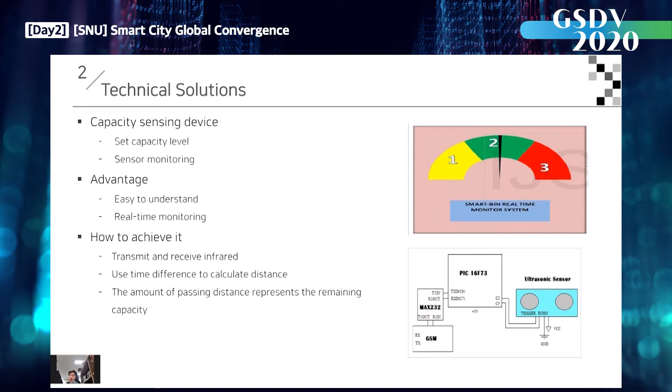The second solution is about how to solve this problem with technology. An ultrasonic sensor can measure the amount of waste and send this data to the center, and the information on waste amount can be visualized on a map.

Chapter 4 is Management Solutions. We believe SNU students will solve the waste problem on our campus. We have prepared a mobile Living Lab platform for students to participate in this campaign.

A Living Lab is an intersection of scientific innovations. It is a user-centered, open innovation system, often operating in a way that integrates current research and innovation processes within a public-private-people partnership. Living Labs are natural sites of convergence, bringing together different approaches to solve real campus problems.

The mobile app Keda is a student-made Living Lab platform on our campus. Keda integrates a real-time monitoring system, and data is collected from students and their mobile devices, then processed and analyzed to allow campus officials to interact directly with the community in order to enable better waste management on campus.

The addition of citizen science as a byproduct—smart citizens, in this case smart students—could strengthen the relationship between citizen science, smart campus, and living labs. Smart citizens make it possible for living labs to flourish through their scientific and cultural literacy.

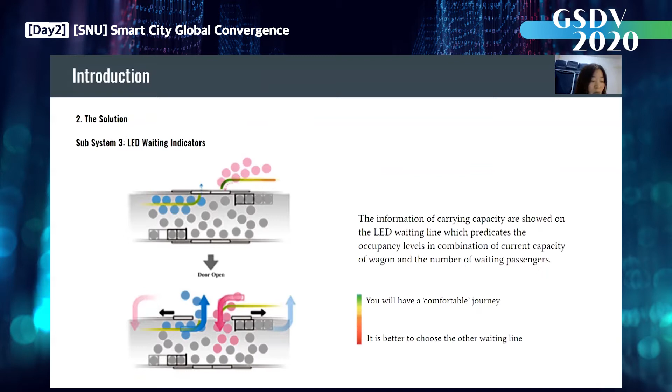The last sub-solution is the LED waiting indicator. The predictive information of carrying capacity will be shown on the LED waiting line. It predicts the occupancy level by combining the current capacity of the wagon and the number of waiting passengers, providing reference information for passengers to choose the better waiting line. In addition, passengers can follow the LED guideline for better and faster entry and exit from the subway efficiently without blocking traffic.

This part is theoretical background. The goal of the project is to provide a more efficient and comfortable transportation system for subway passengers.

To achieve this, we need to identify three major components of a smart city. First is the technology component. We use ICT and big data to secure data applied to our project. In order to secure this, sensors that collect data and technology that process data in real time are required.

Second is the human component. In order for our project to work properly, we need to identify the problems people are feeling, and we need to make sure that people are aware of the usefulness of the project we plan to use.

Third is the government component. The government provides necessary data for this project and participates through investment infrastructure.

The most needed resource for this project are data and sensors that can collect data. It also needs an algorithm that can process real-time data collected through sensors.

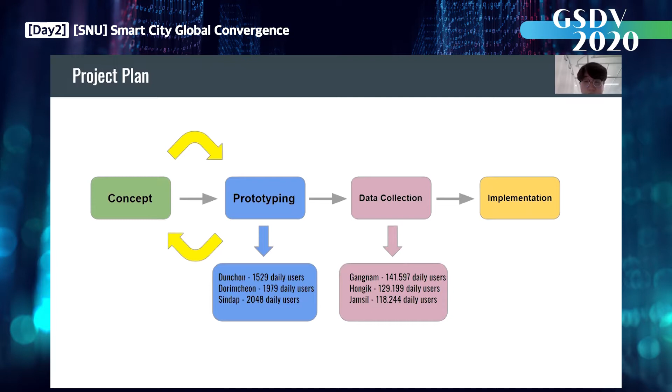So our milestones are as follows. First is empirical on-site research. We should observe passengers' behavior and gather empirical data of how passengers move in the station. Second, we can conduct demand research.

Third, we will operate test workshops to see whether the value of smart passenger allocation systems are successfully delivered. And the last milestone is data access and data collection. In this stage, we should care about the privacy issue.

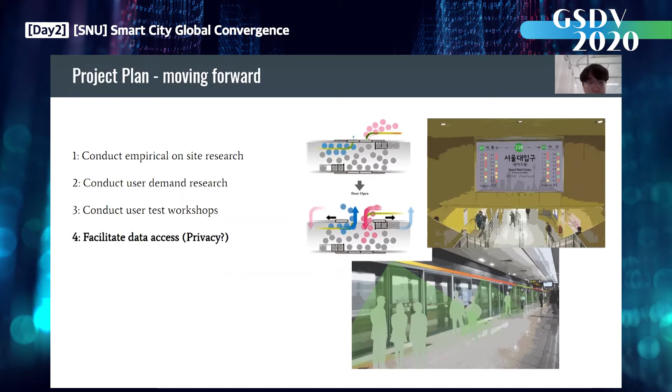This is our reference, and this is the end of our presentation about smart passenger allocation system. Thank you for your listening.

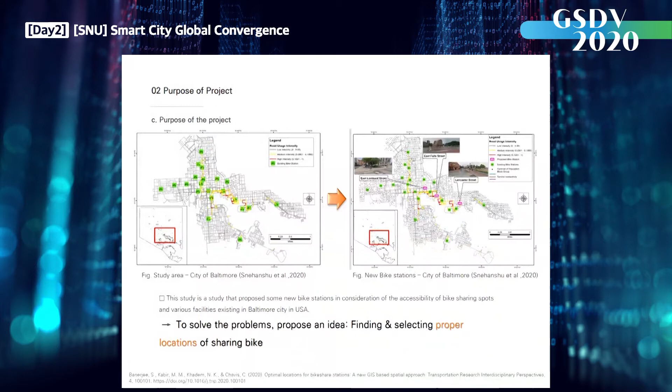This chapter will introduce the contents and methods of the project. First of all, this project consists of 4 main frameworks. First, we plan to collect prior research and issues on the project topic. A literature study will confirm the role and importance of shared mobility, especially shared bicycles. At the same time, we will set a direction and purpose of the specific project. The following pictures are excerpts of some of the papers and articles we collected during the pilot studies.

The third step is to derive the location characteristics of the rental facilities through various data. In this course, we will select location characteristics in three main ways. First, we will derive the universal location characteristics of the rental facilities by utilizing papers and literature related to the location of shared mobility rental facilities. At the same time, our group will conduct a density analysis of public bicycle rental facilities operated by Seoul and other cities to derive location characteristics from the overall area.

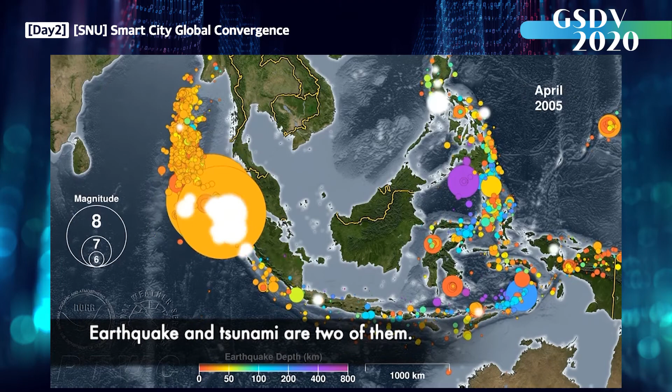Despite being blessed, Indonesia is so prone to natural disasters. Earthquake and tsunami are two of them, leaving people on the coastline in danger. Tsunami causes loss of homes, jobs, and even lives. Aerial survey with drone can map coastal terrains with 3D images. This spatial data can be useful for decision making.

When the disaster doesn't occur, with a good business model, drone can be a source of living. Drone can give a bird's-eye view of coastal panorama as a new tourism attraction, for resilience and sustainable development of Indonesia.

The second case is a solution for Rwanda, wildlife safari. In the past, the only way animals would benefit people was through hunting, which is a one-way relationship. Today, because of ecotourism, both people and animals are taking benefits.

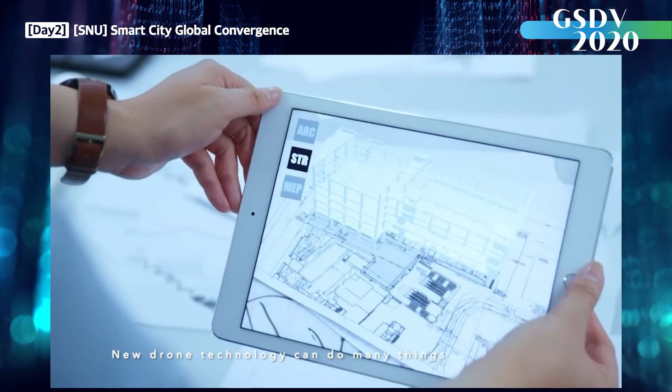Sensor-equipped drones are used to gather data of airflow between buildings for vegetation placement, even directing the way of pedestrians. Traditional building inspections can be expensive and time-consuming. New drone technology can do many things in a safe and inexpensive way for better city planning.

Another global case is in Rwanda. Kigali, the capital city of Rwanda, is a modern and clean city, but outside of it, the infrastructure deteriorates fast.

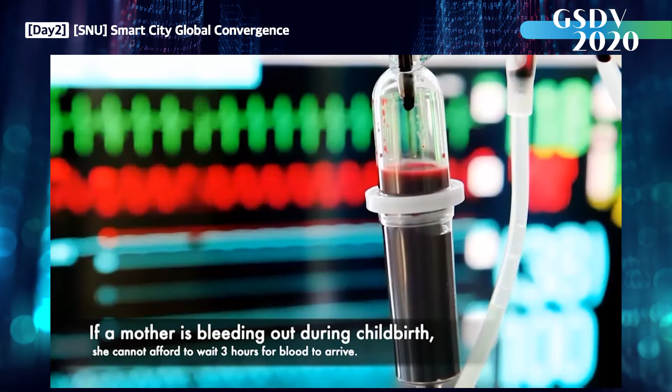Medical supplies by nature need to be on hand quickly. If a mother is bleeding out during childbirth, she cannot afford to wait 3 hours for blood to arrive. A company called Zipline is working to solve this problem with its fleet of autonomous drones.

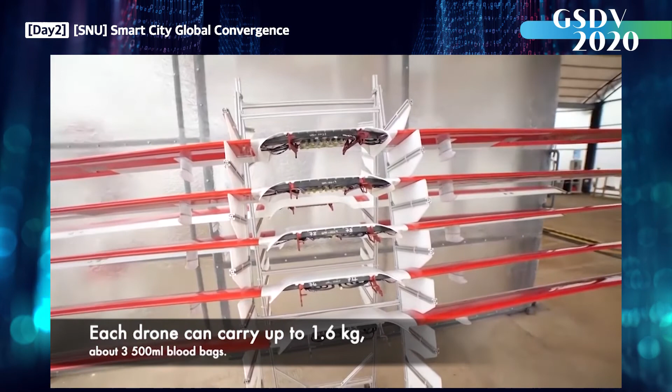Each drone can carry up to 1.6 kilograms, which is about three 500 milliliter blood bags, with fast deploy and can fly autonomously at a speed of 100 kilometers per hour. These drones are so important to Rwanda's healthcare sector, saving lives at the perfect time.

Now we are making proposals for Siheung Smart City. The main proposer is Siheung Global Drone Innovation Center. Not only for the National Innovation System, Siheung Global Drone Platform should be able to provide services for other countries.

Global Siheung Drone Platform offers services such as 3D map generator from drone survey, 2D image analysis system for on-demand case or specific system, real-time image analyzer for special real-time cases, global ground station operation, LiDAR, smart radar development and other drone equipment, and business model incubation for drone utilization.

The Innovation Center will function in many ways. As a global drone education institution, it will provide drone flight training and issuance of qualifications. It will be a center of global drone technology development with drone automatic charging stations. It will also provide global real-time drone services.

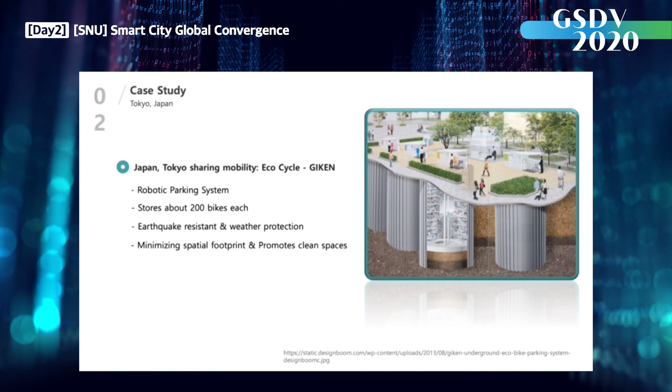The space measures about 8 by 11 meters below the street and is earthquake resistant. Being underground, it also keeps the bike safe from harsh weather and theft. With this high volume and density, it minimizes spatial footprints, promotes cleaner spaces, and more opportunities for green spaces.

So with the increasing popularity of eco-friendly mobility, for future innovations, Japan should first recognize bicycle sharing as a public asset instead of a social experiment.

Secondly, electric scooters are recently grabbing attention and are planned to be released as a next-generation transportation method in Japan by this year. The goal is to provide a safe vehicle for all ages by being lightweight and easily adjusted when it comes to speed.

However, the challenge within this is that electric scooters are considered a motorbike in Japan, thus one needs a license to ride one, which limits its scale of users and accessibility.

Nonetheless, the case of sharing mobility in Japan can teach us a lot about what to consider, how to further and better implement it into our campus today. Let's take a look at site analysis.

In Seoul National University campus, students can take city buses and shuttle buses. However, many students have to walk most areas of campus since there is no transportation going through the campus. Especially, Gwanak campus is located on the mountain, so the slope of the road is very steep and the distance between buildings is quite long. These factors make it more difficult for students to move around campus.

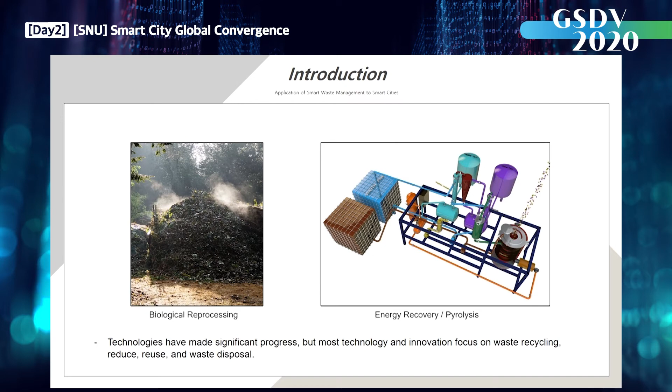Technologies have made significant progress, but most technology and innovation focus on waste recycling, reduce, reuse, and waste disposal steps, such as biological reprocessing, energy recovery, and pyrolysis process. But for the waste collection, transport, and waste segregation steps, they still function as they did 30 years ago. It's not really smart enough for cities now.

For our project, we will focus on combining waste management problems with smart technology and innovation, such as IoT, big data analysis, AI, robotics, and so on, and try to find out a new smart waste management system. Waste management is an unavoidable challenge in today's smart city, and it's also a problem that people in the city can experience in their daily life.

As we know, the biggest problem in waste management is separating waste. In this case, technology plays an important role. We promote cases with separating and technology as keywords.

The first case we promote is a smart bin. Why smart bin? The problem in separating waste is a big issue. Currently, technology cannot properly separate all types of waste yet. That's why separation of waste is still an important thing to do to speed up waste processing. Not everyone is familiar with separating garbage, especially foreigners.

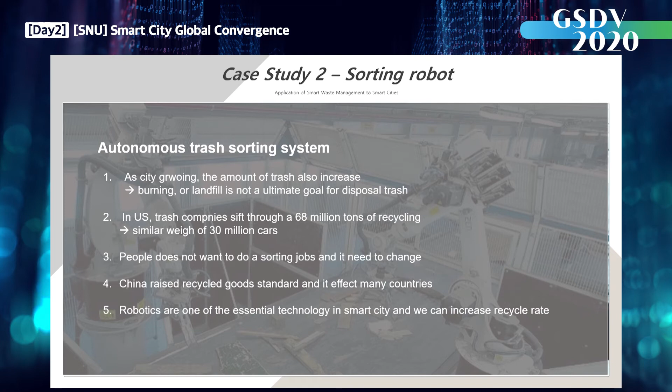When using this robot, we do not need human resources for this job. Second, as many people are concerned about the sorting rate, with AI or deep learning we can increase the sorting rate. In Google's case, using this robot, they reduced the waste rate in their office from 20% to 5%. Furthermore, we can expand this mechanism to other places.

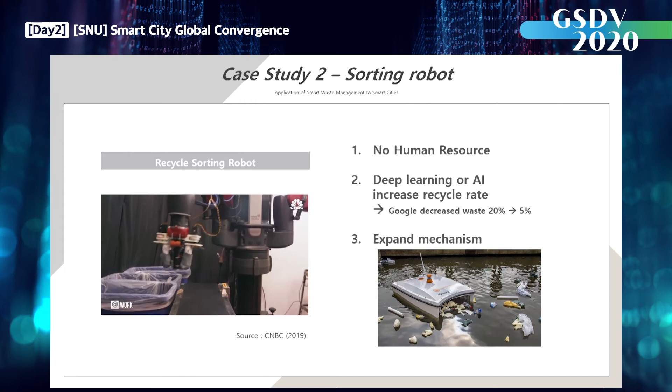As shown in the bottom right picture, we can use this mechanism for sea or river cleaning, or stadium or concert cleaning. How do we apply this technology at Siheung campus? We can expect two cases.

First, we hope that Siheung campus becomes crowded with many companies, such as startups or ventures, like Google, where robots move around the office and sort recycling garbage. It sounds complicated, but it's easy to understand if you think of a robot vacuum cleaner that also has a recycling classification function.

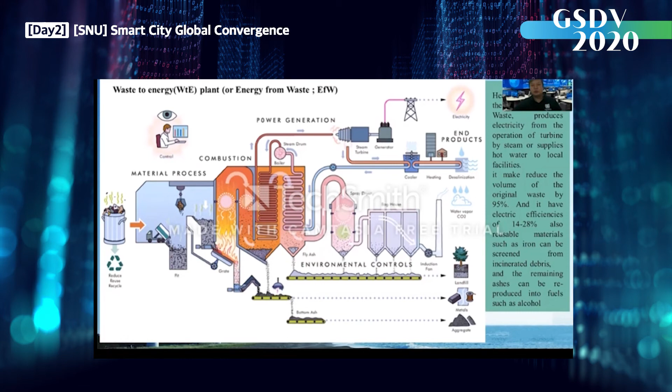The other 50% comes from selling the energy, electricity, and heat. The general process to generate electricity in waste-to-energy power plants is similar to other power plants. The only main difference is they use waste materials. This waste material will be transported to the combustion chamber, and high-pressurized steam will be generated. This high-pressurized steam will rotate the turbine, and the turbine will rotate the generator where the electricity is generated. This high-pressurized steam is also the main resource for the heat.

First, rubbish or waste will be unloaded from trucks, and they use loading claws which transfer the rubbish to a conveyor. All the waste will be sorted out using an optical sorting system with cameras, and AI technology will be used. The main reason is it removes harmful waste, and the sorted waste will be transferred to the combustion chamber, with the whole process monitored from the control room.

In the combustion chamber, the temperature reaches 850 Celsius, the same as volcano lava. After burning the waste, about 20% of the waste remains, called bottom ash. From the bottom ash, metals are removed by powerful electromagnets, and 50 tons of metals are collected every week, which are sold to the recycling center.

And these debris will be used to make construction blocks and also for roads. And all this process will be monitored 24 hours, 7 days a week from the control tower.

Oslo City has a plan to increase their capacity. They want to add capacity which will use another 160,000 tons every year, producing 55.4 megawatts of heat, supplying an additional 40,000 households, and additional 10.5 megawatts of electricity, supplying another 20,000 households.

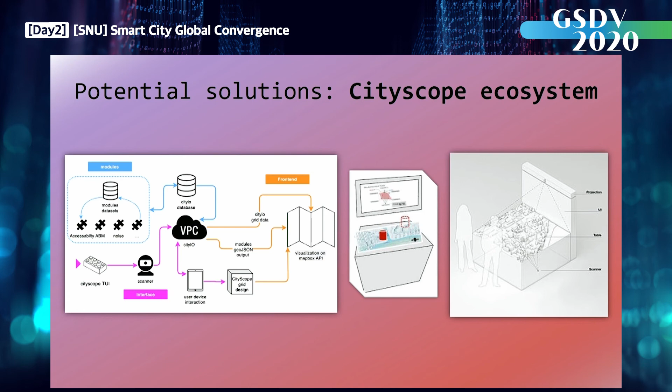Cityscope is an undertaking led at the MIT Media Lab City Science group. It combines a tangible, interactive table and digital platform to solve urban planning and design problems. They develop and deploy these tools around the world and maintain a free and open source community for the majority of their work. Urban performance indicators include three core modules: a physical 3D model, a tangible interactive interface for interventions, and a feedback system that computes and analyzes units.

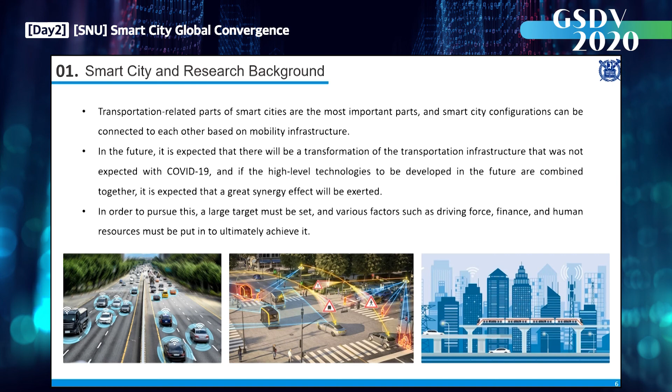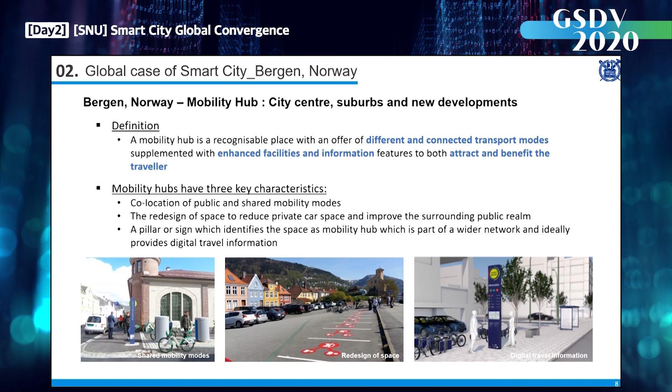The second topic is about global cases of smart city. This definition has been created building upon European best practice. A mobility hub is designed and specially organized in an optimal way to facilitate access to transport between modes, as well as provide extra transport-related and digital services. Mobility hubs will generally, but not necessarily, be situated at significant points on major public transport corridors, as they form a critical element in supporting high-frequency public transport within cities and large towns. Mobility hubs can be seen as an interface between the transport network and the spatial structure of an area.

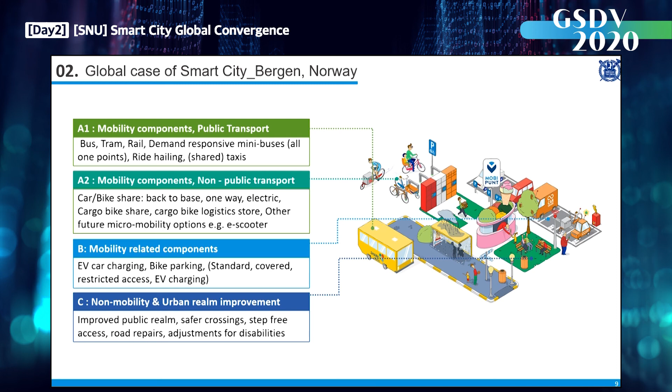Mobility hubs include a range of different components. This diagram illustrates some of the most commonly used components. Mobility hubs can be developed in a range of contexts, from city centers to rural areas. There is no one-size-fits-all design for the mobility hub. Tailor-made solutions need to be created for each location using experience from other countries. Mobility hubs need to be adapted to the setting, both in terms of the type of component and their scale. By overlaying the type of place, such as workplace, each area will be able to create a set of combinations which can be replicated across their area.

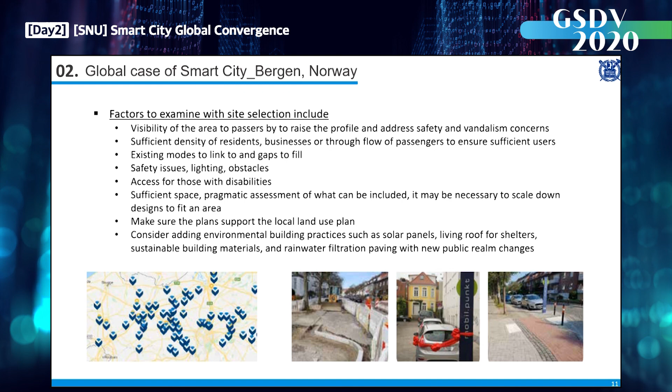Next is about Japan's smart city case. Japan planned the smart city in 2016. Japan's smart city aim is to create new value by realizing a new society through new industries such as IoT, big data, robot technology, and AI, and by building a system that highly fuses virtual and real spaces in cities. They have 5 strategies to implement the smart city.

Among these, we will talk about mobility. When planning transportation as a background, it was planned to make it easier for all citizens to move from the outskirts of the city to the urban centers. Therefore, they established a system that enables autonomous driving.

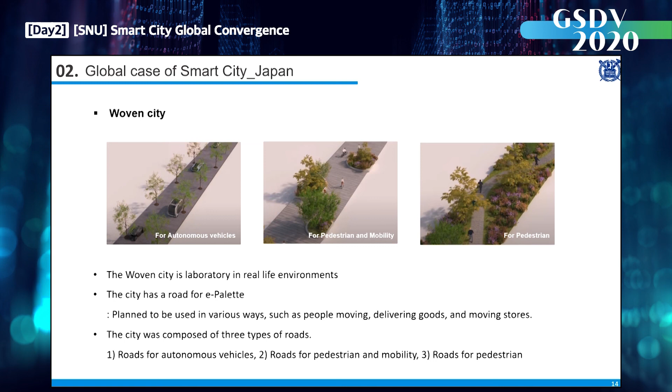The city has a road for e-Palette, like autonomous car, used in various ways. To use the car, the city was composed of three types of roads: roads for autonomous vehicles, roads for pedestrian and mobility, and roads for pedestrians.

The third is about ideas of a smart city solution. Rapid urbanization, aging infrastructure, and population growth continue to challenge the world's cities nowadays. Cities that take effort to advance and diversify their urban mobility systems and evolve their transit hubs will gain competitive edges. Mobility hub services provide a focal point in the transportation network that seamlessly integrates different modes of transportation.

They are places of connectivity where different modes of transportation, from walking to rapid transit, come together seamlessly, and where there is an intensive concentration of working, living, and playing. Collectively, this integrated suite of mobility services is intended to meet first and last mile needs of transit users and citizens.

These mobility hub services function as follows: provide access to various modes of transportation, to public transportation, real-time connectivity, traffic information, parking lot information, and also inform people about possible connections, transportation systems, and conditions.